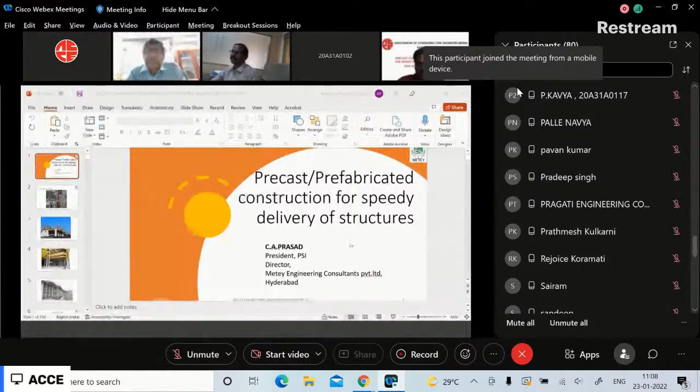So the topic today is prefabricated construction for speedy delivery of structures. Hopefully it will be interesting to you, this new technology. It should be interesting, and we will look at how we will proceed with that.

Let's look at the cast in situ system. In a multi-story construction, you can see it applied.

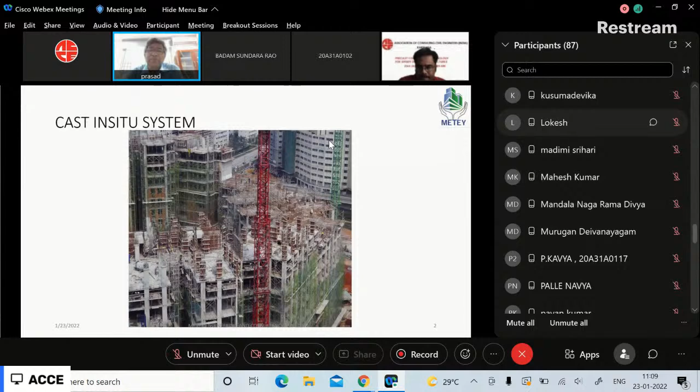So now let us look at the cast in situ system. You can see a lot of congestion in multi-story buildings where a lot of formwork is there all around, especially when erecting. In this photo, what you are seeing is only the column structure. Once the beams and slabs are added, it is pretty difficult to walk around and do all this.

In conventional construction, the formwork plays a bigger role - formwork for columns, formwork for beams, and heavy shuttering, scaffolding works and supports. When there is a big podium, you need about 6 to 10 meters, and very heavy shuttering comes into play to support it. Sometimes you even provide steel beams over entry portions to support this.

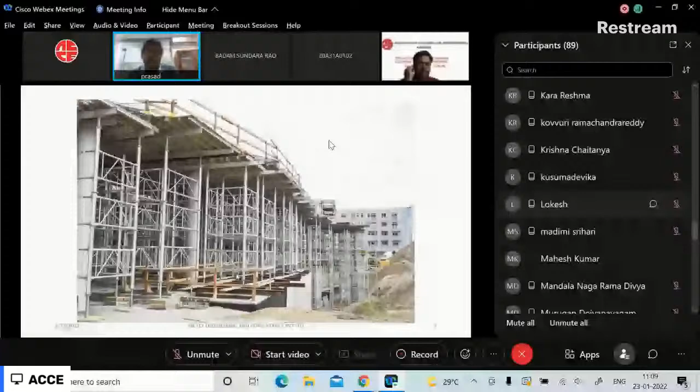But when you look at a precast system, all these elements come from the factory - wall panels with openings and all - and you don't see any congestion at all. The elements are directly coming there, you hardly see any labor into the system. This is the beauty of precast construction.

Now let's look at precast abroad, especially in America, Middle East, Europe and everywhere they are constructing this way. Even facade panels are built using precast elements, and you can see colored facade panels made using a colored pigment - they add a pigment into the concrete and get a beautiful color of whatever they want. We are doing this now in India also, and that's a good sign.

In the buildings, I have been in the Middle East starting from 1995 to about 2005, for about 10 years. When I went there in 1995, there were only three precast companies. By 2000, about 10 precast companies had come. By 2005, there are about 20 precast companies.

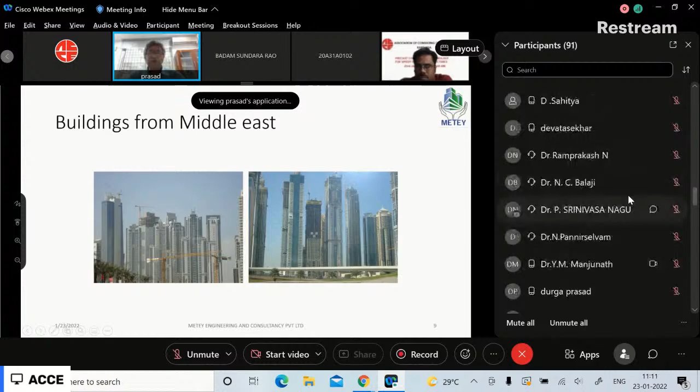Still they are insufficient for the big development and growth that has taken place in Dubai and the entire Middle East. This is how you can see the mushrooming of towers, all built predominantly using precast structures, and some structures are even built with cast in situ too, because the precast factories are not able to meet the demand. That is how this has come about.

Even looking at conventional construction, in 1995 a 30-story structure was taking about 5 years to build. By 2000...

So there is a beauty with precast construction as well as conventional construction, because rapid changes have come in formwork also. Sometimes it is partly conventional and precast mixed together in these structures.

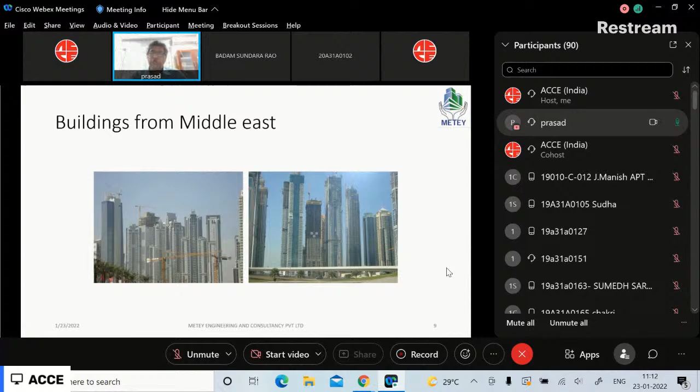Especially when talking about lift core walls and such, they still go with the conventional form, whereby slip form technology and jump form technology are used for the construction of these lift core structures, such that they go faster than the structure being built with precast or conventional construction.

Now let's look at some of the precast projects in India - this is Omkar in Mumbai. What the government has provided in Mumbai is, in the slum rehabilitation areas, they first have to build the structure so whoever the displaced people are can be accommodated, and then for the remaining area, they can develop what they want.

As a result, L&T have taken up this particular building to be built as a 20-story structure in 1 year's time, such that all these slum people can be accommodated into this building. Thereafter, they can construct the building.

So in order to do a 20-story structure, so far precast is the only answer. They have set up a precast unit there itself and built this particular structure within no time. In this structure, they have even made the toilets as a box-like structure with the door opening, such that there are no leakages. Toilets are the hell of the thing whereby leakages happen. So they made the box-like structure, brought it and put it into the structure. Thereafter you can see load-bearing precast walls, precast stairs, and hollow core slabs coming on top, which is a very simple way of construction. That's how they have done as much precast as possible, such that there is no in-situ construction at all in this structure.

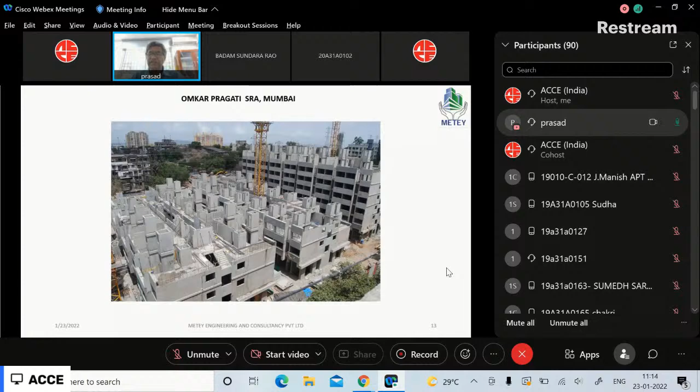Some CTS Canteen Pune is a precast structure. Santushti Homes at Bhiwadi is a 250 affordable home, G plus 3-story blocks, again with a load-bearing precast wall and hollow core slab section. This is how these buildings have come up, with load-bearing precast walls coming on trucks, and the tower crane will lift and place them one over the other. They have dowels from the walls, such that one wall comes over the other, and then they grout it. I'll show you some more details as we proceed.

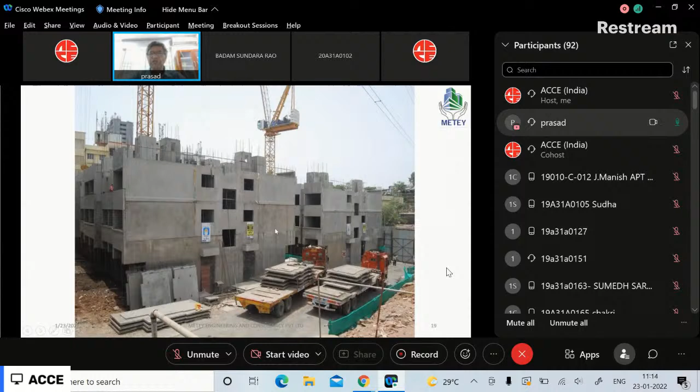Even Lakeside at Chennai is being designed by one of my friends, Saurabh Purandare, a precast designer. He does only precast designs, whereas I do both. He's a wonderful designer from Pune. He has also designed a 16-story Pina project for Tata at Bangalore. We can see that again it's load-bearing precast walls and hollow core slab.

Now I have been talking about load-bearing precast walls, not precast columns and beams. The beauty and advantage with load-bearing precast walls is that in the case of an RC frame, if you are constructing a column and beam and on top of that hollow core slab is building, you have the flexibility to build the wall again inside with AAC block wall or brick wall. But in a load-bearing precast wall, the hollow core slab will come and rest on the wall, so it's like a uniformly distributed load for every millimeter of the wall. That's why we call it a load-bearing wall.

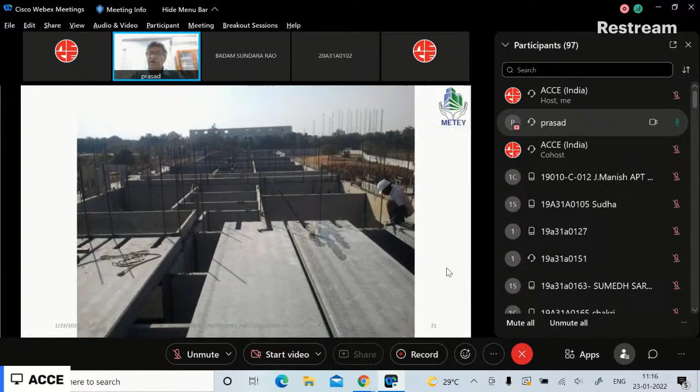For every millimeter portion of the wall, there is a slab load coming on top, uniformly distributed. When you provide a load-bearing precast wall, no columns and beams are required. It is directly an element eliminating everything. In RC frame construction, you have columns, beams, and an infill wall. Now all these three are eliminated. Only a wall is coming in place of it, which is a concrete wall. There's no plastering required thereafter. A slab is placed directly on top, and then a structural topping is done. I will talk about structural topping a little later.

Now Janapriya was the first developer in Hyderabad to take up precast, and at that time they involved us to do this particular design. So these are all precast walls with openings and all, and you can see some dowels coming out. What they do is the dowels coming out from the foundation go into the sleeves, which are 60mm sleeves provided. This dowel from the foundation will go directly into that, and thereafter we'll grout that particular portion, and it will be in the correct position.

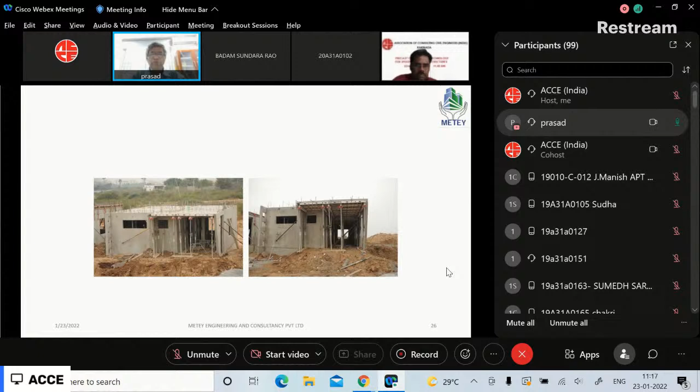At that time the gentleman did not take the precast hollow core slab because he had a fear, back in 2005-2010 when they took this up, that the hollow core slab would not be accepted by customers because there is a hollow inside. So we went with a PT slab for this building, but with load-bearing precast walls. Load-bearing precast walls, but with a PT slab, that's how we went up with it. Yes, you can make the wall of whatever elevation type you want, with openings and all, and elements can come and directly get erected over there.

But in the same compound, those are villas. Janapriya have taken a call that yes, let them deliver a building within 1 year instead of making people wait for 3 years and then pay the loan rent to their bank. So they have also done a 10-story structure in the same compound of about 4 towers, which they have made.

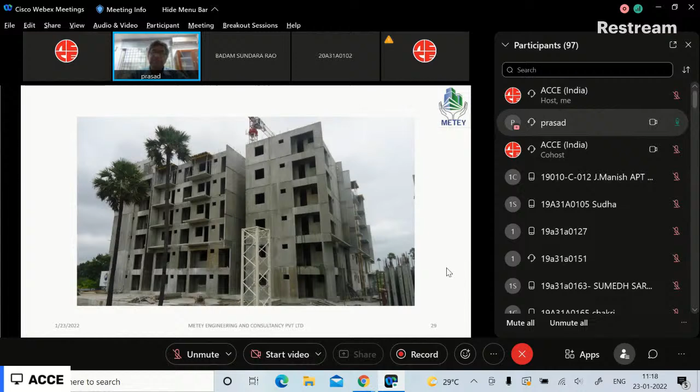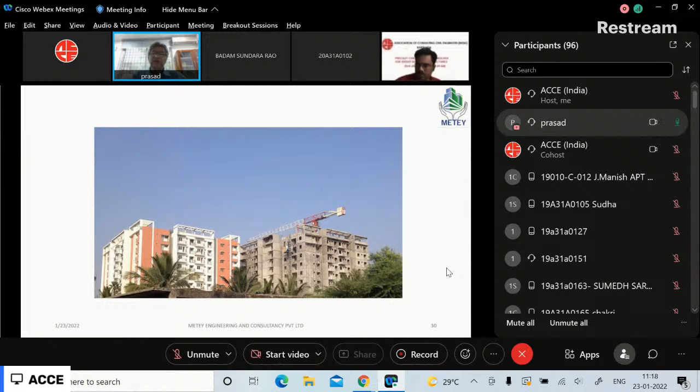In each floor, they are getting about 10 apartments using load-bearing precast walls, but with a cast-in-situ slab is what they have done. This is a 10-story precast structure, and they have delivered it within a 1 year period. The customers are also happy of booking it within 1 year, getting the building instead of waiting for 3-year long period, which the developers usually will take.

Thereafter, BDA Bangalore, Bangalore Development Authority, have also done using some Gauri precast at Alur, Bangalore, where they have done a different type of construction.

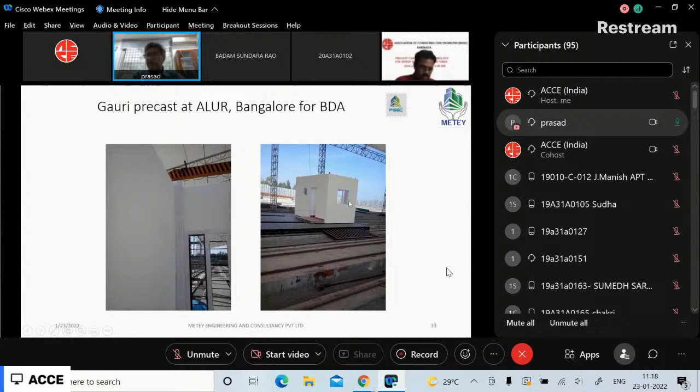They do the independent walls here, and then they connect all the walls together with a bottom slab, and then the walls are all connected. Everything is finished at the bottom level, including painting, doors, even the kitchen tiles and everything with those. This they will lift and then bring it over here on the rails to the end, put it on a truck.

This will go to the place, one placed over the other on top. Like this, the 4-story towers that they have built with a quite good number of structures, with ease. So thereby no one is required to go to the top and do finishes again. It's a bottom slab, walls are connected, everything together, painting, everything is done, finishes, and then this is lifted and placed one over the other. That's how this construction went on.

So 2 types I have just shown. One is Janapriya developers, the other is BDA's. Now we look at the precast industries.

There are a number of precast industries that have come up now in India. In Hyderabad, Janapriya developers have set up a battery mould for their own use, and PRECA is a factory which is delivering structures to industry, both for the building sector as well as for the pharma and industrial sector.

Skill Promoter again has built one huge shopping mall at Kondapur near the high-tech city. They have built one hollow core slab unit within the factory itself, and they have built a wonderful commercial complex over there. Inventaa Hyderabad, Inventaa is now setting up.

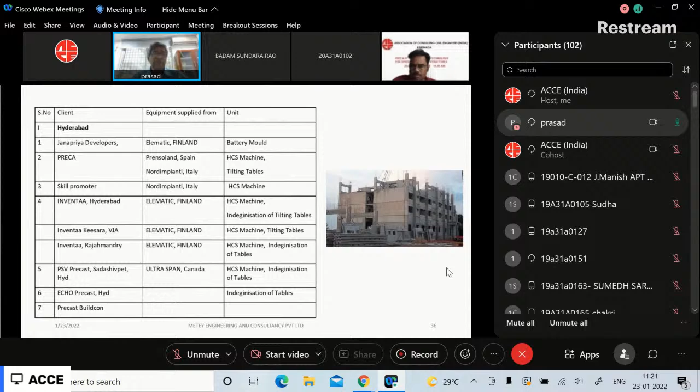So Hyderabad is now very well set up, and there is one more factory that has come up, Teenage Precast, which has come very near to Nalgonda. Teenage is basically from Coimbatore, now they are branching out. They have set up one in Nalgonda. From Coimbatore, they are meeting the requirements of even Chennai as well as Bangalore. They have set up a big factory in Nalgonda, and they are also meeting the requirements of Hyderabad.

In Chennai, BME Precast is one wonderful precast firm where they have delivered structures for DRDO and other commercial structures, and also built one big hotel project in Chennai.

In Pune, there is Precast India Infrastructure, where my friend Mr. Ajay Bhate is there. He is a very passionate civil engineer who set up this precast factory in a very big way and is doing wonderful structures. I shall show some of the structures we built. And then there is Best I Precast, which I also helped set up in Pune.

In Mumbai, L&T set up one facility for the purpose of a particular structure, and then removed it, but they have delivered the structures.

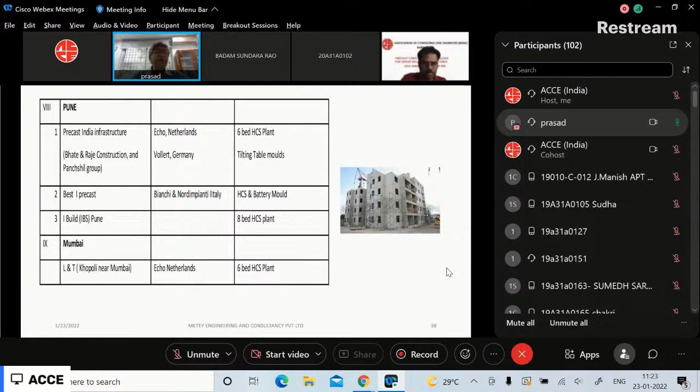In Noida, Supertech is in the entire NCR region. I could see only one full-fledged precast firm, which is Supertech. Now they are also delivering stilt plus 8-story towers for DRDO, which are being designed by our firm METEY.

BJ Shirke has done wonderful structures for Delhi Development Authority. BJ Shirke has a very different technology where they make a hollow portion precast column and then pour concrete on the side. Even for beams, they get a channel in a U-shape type, such that they put the reinforcement thereafter, and then pour concrete into that. It's a different technology which they use, but it is doing well. Structures are well tested and proven even by IIT Chennai, and they have checked it and found it to be very good.

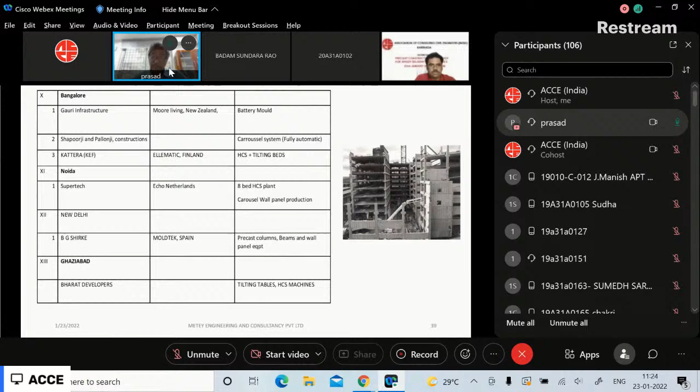Bharat City developers in Ghaziabad built 30-story towers and 16-story towers like this in the NCR region, which is an earthquake zone 4. They are wonderful structures. I will show you some of the properties.

Now, types of precast frames are such that there are precast columns and beams, and initially there was the hollow core slab. Later on, structural elements are like pre-stressed precast solid flat slab, or hollow core slab. I shall come back to this in detail - what is hollow core, and why we are making a hollow core. Then there is single T slab and double T slab.

Single T slab and double T slabs are predominantly used for car parking structures, large span structures, whereby you can even use them in shopping malls where they want a large column-free space. Hollow core slab can span up to a maximum of 15 meters, and the thickness increases as you increase the span. It starts at 150mm and keeps on increasing.

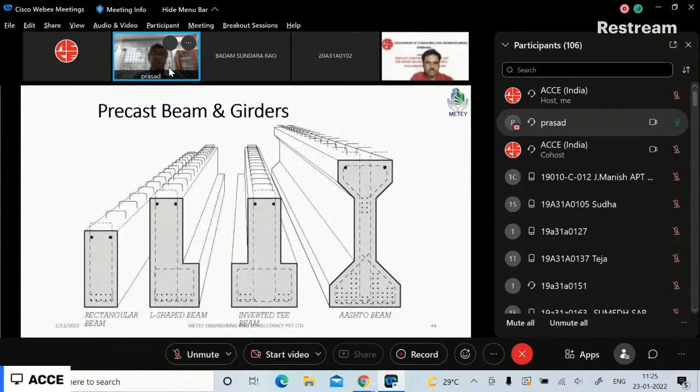Precast beams and girders are RCC precast beams and girders. These girders are predominantly used in bridges, as you might have seen in buildings - we use these inverted T beams, L beams, and even rectangular beams.

Precast columns are such that, in conventional construction, because of the formwork and other things, we construct a column up to one floor, then put up formwork for the beam and slab and cast it, and thereafter the next floor column like that. In precast, if you can lift a 3-story column or a 5-story column, you can construct it at one stretch and then erect it such that you need not do it for every floor. That is one beauty that we have done even in Hyderabad.

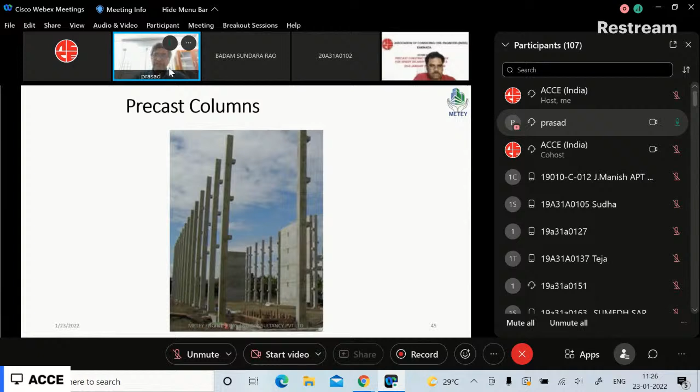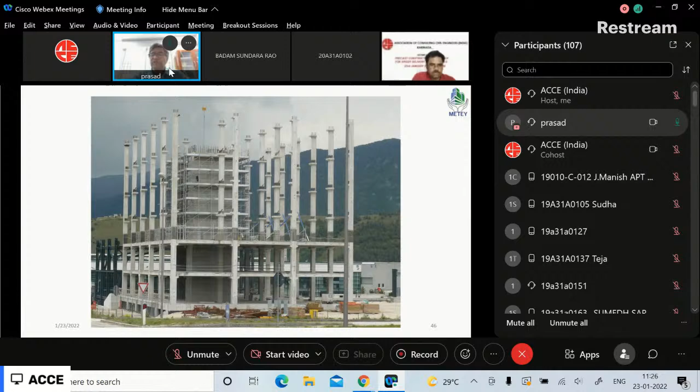In this structure that I am showing, you can see a 2.5-story precast column, and thereafter a 3-story precast column. By doing so, you save time in terms of erection as well as transportation - the ultimate saving in time. You can see that the 2.5-story column and the 3-story column are joined together, and then they pour concrete at this edge.

You can also see that in the 3-story or any column that is built, the concrete is left over at the junction where the beam reinforcement is going to come. Beam reinforcement enters into that junction, and then they pour concrete into that junction, and then you have a corbel to make the beam sit on this corbel.

To make the beam sit on this corbel, you can see at the bottom the beam is sitting on that, and then a double T slab is sitting on the beam like this. This is how the construction will go on to make it faster. Other precast slabs are such that they can simply be erected with a lifting arrangement with a bracket. You can erect it over brick masonry walls, an RC column frame, or a load bearing precast wall, whatever way you want.

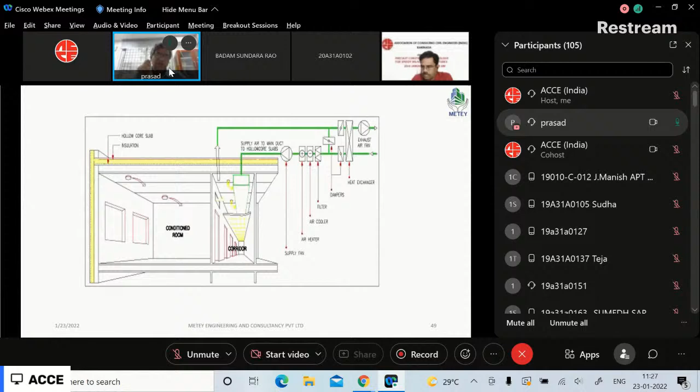There is a shopping mall in which we have used hollow core slab as a ducting system, because there are hollows inside. You can make the air circulate around, and make a hole wherever you want so it circulates the air inside. By doing so, the shopping mall was saving about 40% of the air conditioning bill. Why? Because they cool the structure a lot at night time, such that in the daytime it won't take much power consumption. This is one of the facilities that hollow core slab can be used for, but it has to be properly designed for the particular system.

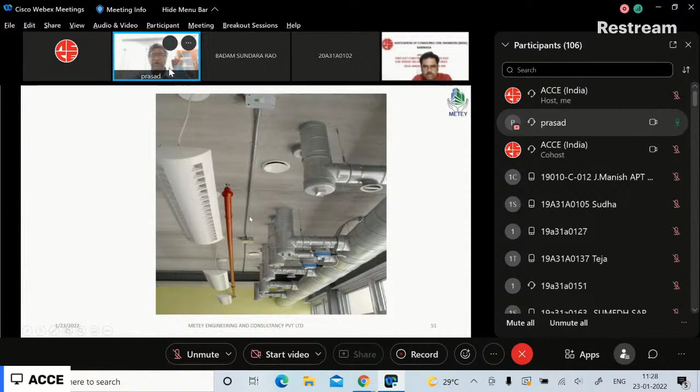This is how we have used it for a shopping mall in the structure. To the hollow core slab, you can fix anything - electrical conduits, fans, pipes, or anything into that, not an issue. Some corrugations are there, but I won't emphasize much on that, just for information purpose.

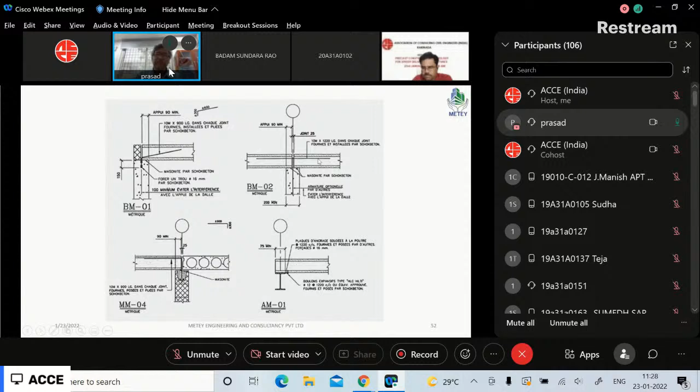On the load bearing precast wall, two hollow core slabs can come. At the junction, we put one more bar for continuity purpose, and we pour the concrete. Over a steel beam also, hollow core slab can sit, or a solid precast slab can sit, and on a load bearing wall also you can make the hollow core slab sit.

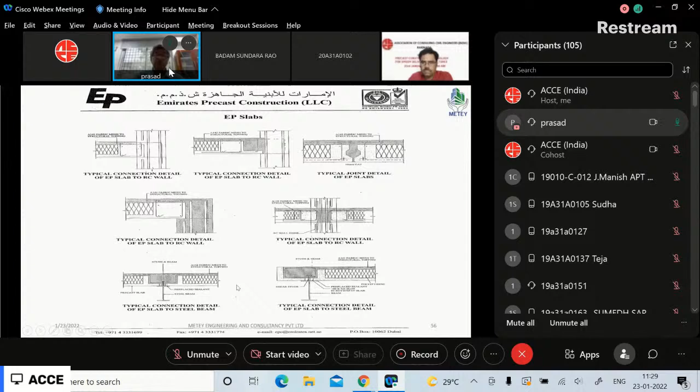You have pre-stressing strands here. These are shear loops which are given for continuity and connection purpose between the top and bottom slab, such that it acts as one monolithic slab. This technology is coined by Emirates Precast Construction in Abu Dhabi and Dubai, where this system is also used extensively. It can be placed over steel beams and precast over load bearing walls and so on.

Pre-stressing tendons are kept here, and initially only 50 mm thick concrete will be placed on top. Thereafter, after placing a number of units side by side, they will do one more structural topping as a connection to all the units, which creates a diaphragm action and brings continuity into the network. These double T slabs have a beauty in terms of large column free space. I'll show you one of the photos where you will be amazed to look into that. Now you see abroad with double T slabs, long trucks are placed there for 30-meter long, 40-meter long elements going on the track.

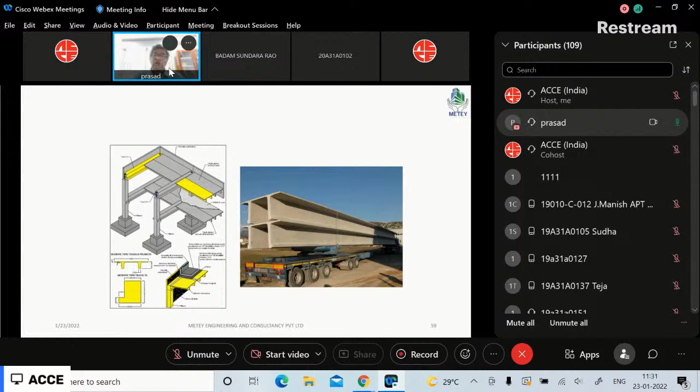So now you just see this. I was just telling about double T slabs. You can see that there is a groove, double T slab with a hanging slab on the side.

Now, there is a column here, spacing is about 10 meters. But then the double T slab is spanning about 30 meters. That means at every 10 meters in one row you have a column, but for the next 30 meters there is no column. From this column to this column, there's a gap of 30 meters.

So for a shopping mall, they have this wonderful facility in terms of racks that they provide. They can provide wherever they want because it's a large column-free space. That is the beauty with these double T slabs, and then the columns are coming with a precast beam at a spanning of 10 meters. So there's one advantage.

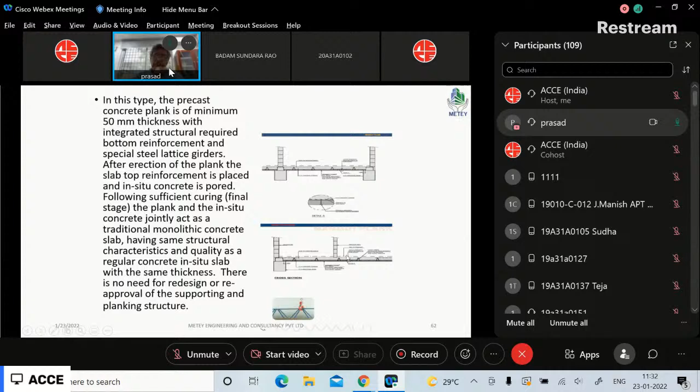Now, all these systems that I have shown involve pre-stressing wires, pre-stressing strands. Without that also we can do one more thing in terms of this particular slab, which can be done by casting only precast without pre-stressing strands.

Yes, this is called a lattice type of system where you can cast only 50 to 75 mm of the bottom, and after placing it on top of the beams, you can pour the rest of the concrete. From the bottom concrete already cast in, this lattice type system will be the bridge to the top concrete, thereby the slab will be monolithic. So this is how it is.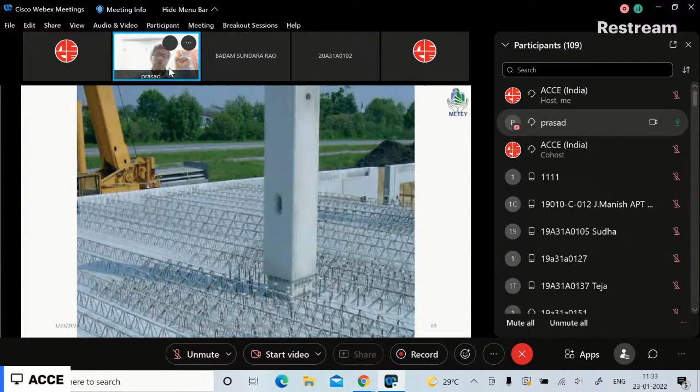You can see that it's about 75 to 100 mm thick concrete and a length of about 10 to 12 meters. They have provided some holes where the columns are coming such that it goes through the columns, and then the structure is done. There is no pre-stressing into that, and the thickness may be required 200 or 250, whatever is required, they will place it.

So what is the advantage? Without using the pre-stressing system, it is just simply a cast and screw system. I'm trying to avoid providing plywood, because only 75 to 100 of the concrete is at the bottom. The rest of the concrete that is required, I'll be providing on the site itself.

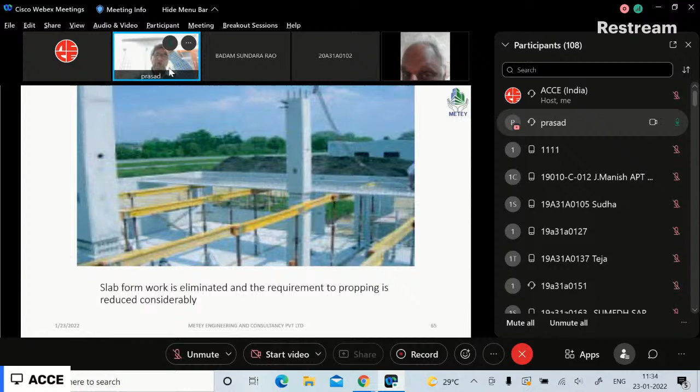So what am I trying to achieve? I'm avoiding the plywood, which will consume a lot of resources. But since it is an element of only about 75 to 100, it requires support at a span of 2 to 3 meters to take the additional load of concrete that we are going to pour. Thereafter, it will rest on the beam till it gets hardened. Thereby we are able to avoid a lot of plywood and a lot of beams in other directions. This is one system anyone can adopt at their level using tables into that.

Now this is how the particular system is placed, and on top of that they pour the concrete. Precast stairs is a beauty, because in conventional construction it is so cumbersome to provide the formwork for stairs. So here, vertically they just put up the mold, horizontal length, whatever the particular length into that, and then they just pour concrete of that width of the stair of about 1 meter height into that. That's the beauty of precast.

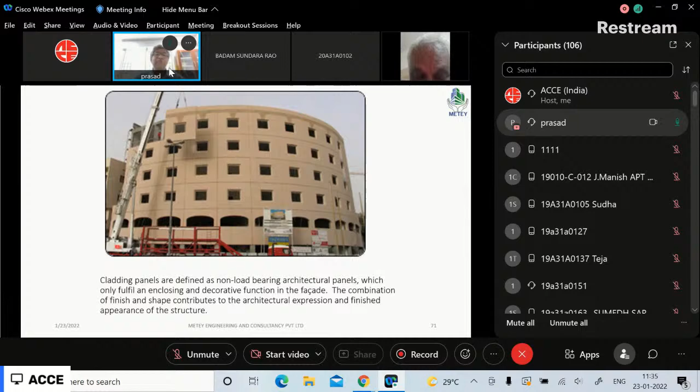Then we have these precast walls. Facade walls are a beauty, curved walls are anything. You make a formwork with steel shuttering and pour concrete into that. They added one colored pigment into the concrete. Here they use white cement, and then use the pigment, and they get a beautiful pinkish color. By doing so, it's a natural color which will sustain there, and there is no need to do painting or anything thereafter. It's a lifelong structure free from paint and other maintenance. That's the beauty which you can do here.

We'll just see some of the buildings. I don't know how many of you have seen this particular building. The last time Chief Minister Chandrababu Naidu was visiting Kakinada, the local MLA said that one precast building is to be built here within a week. So we had this precast wall panels already ready available at Vijayawada.

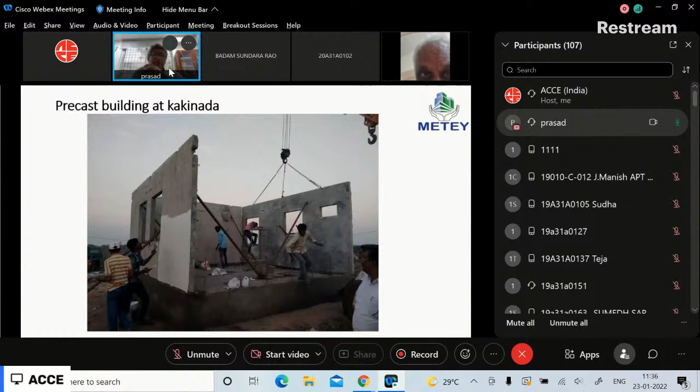So we sent material there, and within 3 days we built the foundation and raised the wall up to the plinth level. Then we built these 4 walls, just 4 walls all around, and on top of that we provided a hollow core slab.

On top of that, because the 4 walls were already there with openings and everything, internally they provided some more walls with AAC blocks, and then on top of it, a hollow core slab. Then they built a bit of a parapet wall, and the building was ready within 1 week.

Where is this building in Kakinada? It is on the beach road. It was built already somewhere around 2017 or 2018, if I remember.

We sent this building with wall panels readily available at Vijayawada, and the building was totally built in 1 week. This is a 300 square feet building with one hall, one bedroom, one kitchen, and a toilet facility.

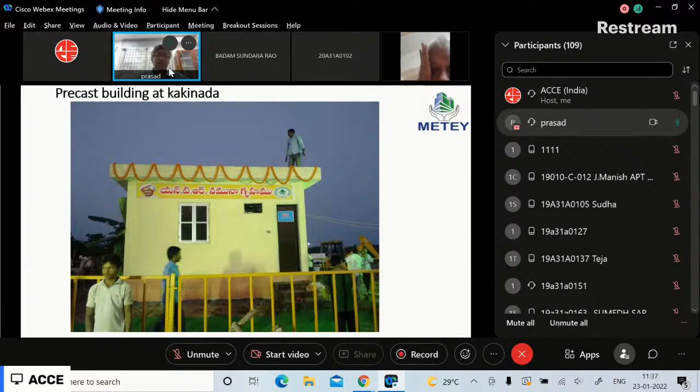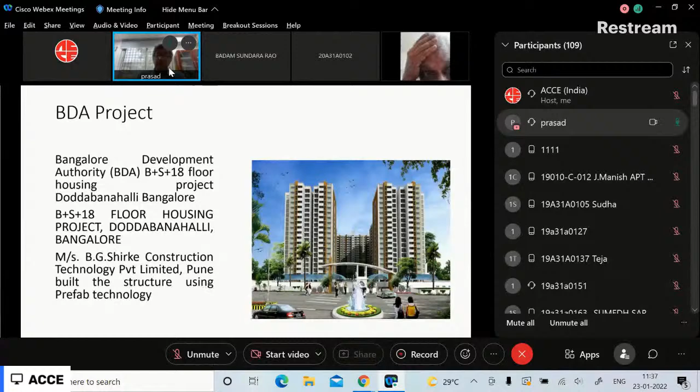Precast India Infrastructure in Pune have built this building. And the BDA project, again, they built basement plus stilt plus 18 floor building. In Bangalore, they built this particular BJ building. In Hyderabad, Preca has built this building.

Steel plus two levels of stilt for car parking purpose, plus ground plus four structure, 1,65,000 SFT. They delivered it in 4.5 months. That's the beauty of precast, where you can deliver in 4.5 months.

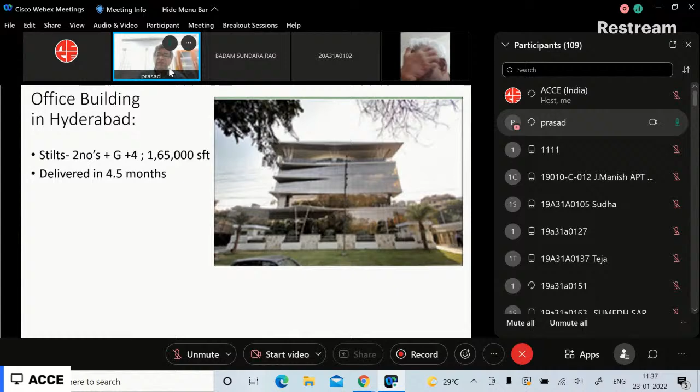That means the main structure, the facade and all that, took its own time. I'm not talking about that, but the main RCC structure was built in 4.5 months. Even G+4, Preca built this for a hospital building, completed in 4 months, a contract of 20,000 SFT.

They have also built one where Preca built on top of a steel frame and put up the precast slabs. For the Cadbury project, 2 lakh SFT, they delivered in 5 months.

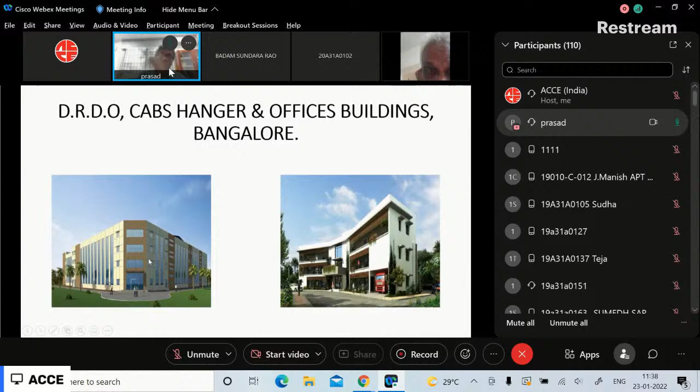These are the BME group in Chennai. They built this DRDO CABS hangar building in Bangalore. From Chennai, they shifted all the material up to Bangalore and built it there. They also built the Novotel IBIS Combo Hotel in Chennai.

This is all precast building, and when completed, it looks like this. The Shivraj Motors building is also built by BME Chennai. Chennai Silk Showroom, Tirunelveli, is again built by BME.

The office building in Guindy, Chennai is built by BME Precast. This is Lakeside Chennai, again built by them. This is designed by my friend Saurabh Purandare.

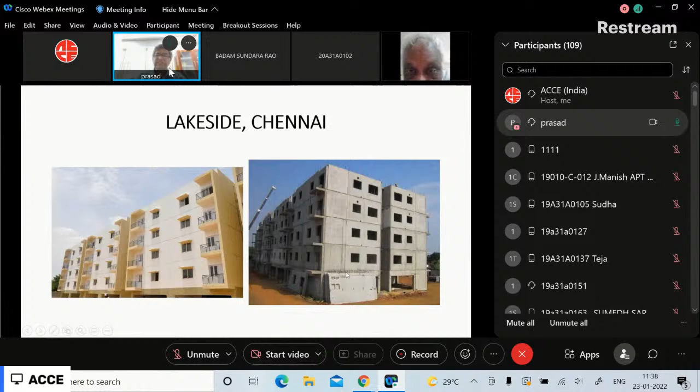Teemage Coimbatore is also doing well. As I said, they built one canteen block in just about 38 days. This is about 13,500 SFT, built in about 38 days.

There are beams, columns, hollow core slab, wall panels, and everything, you can see that. And Rotary School, Tirupur, Tamil Nadu, they just built this building in 28 days.

They just wanted a building, saying 'we want to run a school.' But before building this building, we require time to make the elements. Maybe the precast industry will take 1 or 2 months to make all these elements.

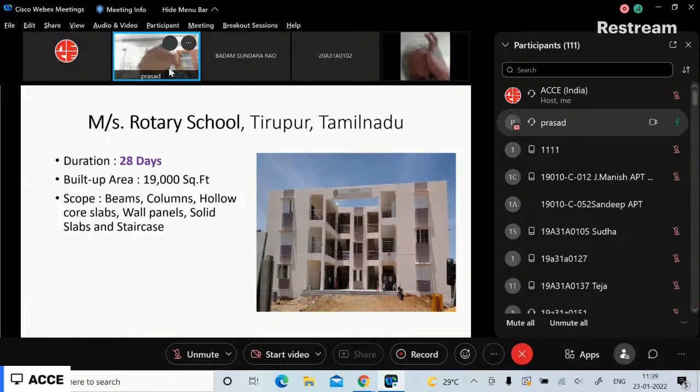The design process goes on, but after coming to the site, it just took only 28 days. That's what I'm trying to emphasize - at the site, it just took 28 days to complete.

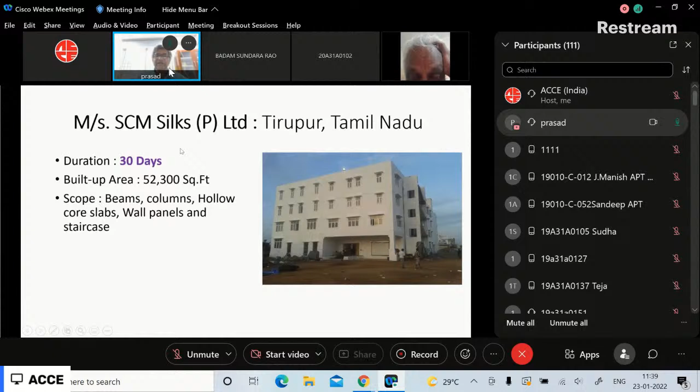So again, SCM Silk, Tirupur, Tamil Nadu, also built by Teemage in about 30 days time, 52,300 SFT. Again, Christian Medical College, Vellore, Tamil Nadu, built a building in 27 days, 50,000 SFT.

And these are industrial structures again, a number of structures they have built. You can see the 3-story precast house which they built for the structure.

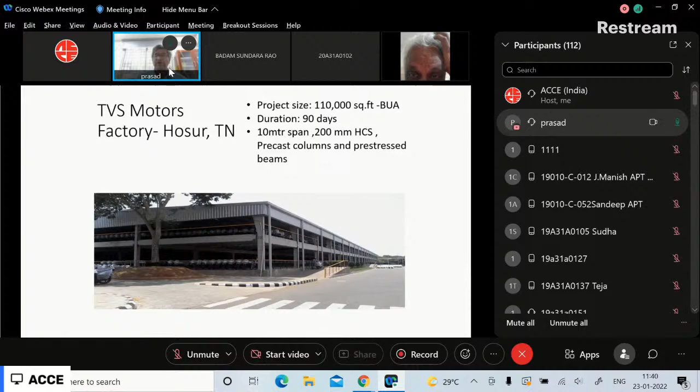The Novotel IBIS we have already seen, and then TVS Motor used the PEB steel structure building, but on top of that they used the hollow core slab, deck slab and all. You can see this hollow core slab, but on top again it is a roofing structure.

It can be a composite structure like that, it need not be everything concrete - steel plus precast hollow core slab, a composite structure. Now this is what I was talking about.

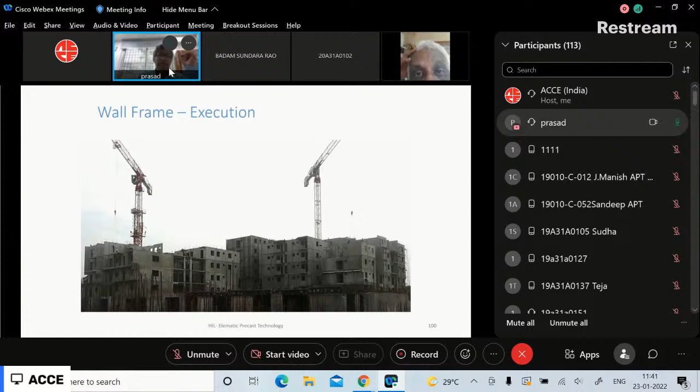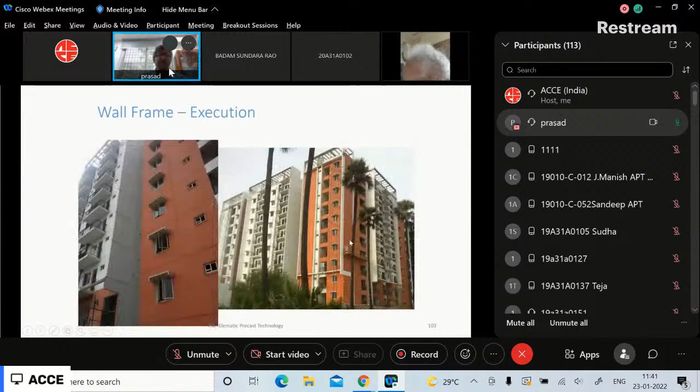In the NCR region, Bharat City developers have adopted this particular structure, building 16-story and 30-story towers. My good friend Bob, who is from abroad, Europe, designed these buildings with load-bearing precast walls. The elements are built using this structure, and when completed with paints applied, it looks beautiful. This is how the wall frame execution is done.

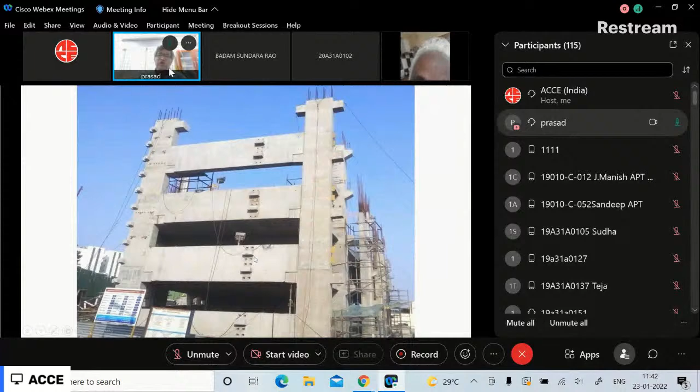Now you can see one concave and one convex precast element, fixed all around as a facade structure. To fix those elements into these precast beam elements, they have provided supports for the concave and convex elements to come and get fixed over that. You can see these elements coming out, the precast columns and beams, with hollow core slabs inside. All these protruding elements are meant for these concave and convex pieces to come and fix in like that.

The air flows into that, light goes inside, such that there is no lighting required in the daytime. It's a wonderful concept. But the beauty is how much struggle they made to create this particular element, then transport it, cast them, transport, store, and erect them. They wanted to do a beautiful structure, and with precast, there's a beauty we can achieve. With conventional construction, it's too difficult to do, I'm sure all of you will agree, but in precast this is quite possible.

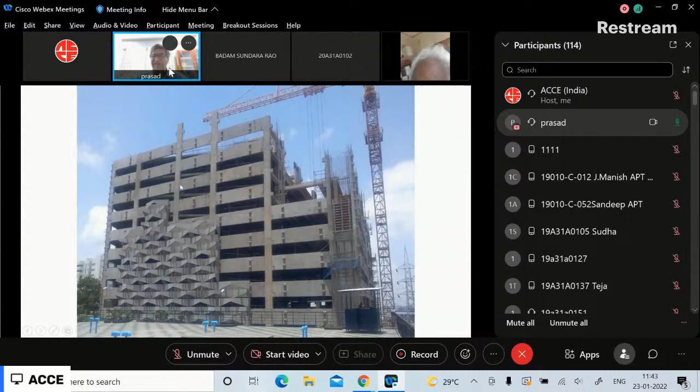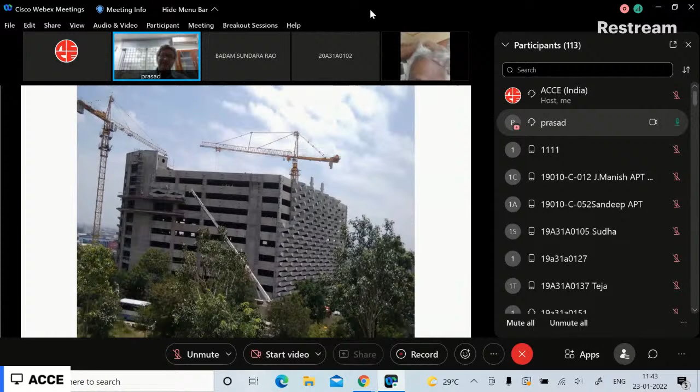Each individual element is fixed over there with wonderful precision. Whenever I see this building, I take a lot of pride. What a beautiful precast structure and facade that Precast India Infrastructure have built. It is the beauty of the structure.

Now, an 11-story residential precast wall construction is built at Uppal, Hyderabad. I appreciate the Telangana state government, and my friend C.A. Prasad, who convinced the GHMC, Greater Hyderabad Municipal Corporation, to adopt this technology in that district where there are about 34 towers. Conventional towers, monolithic construction, and precast construction have all been built there, as we wanted to demonstrate 3 technologies at one location in Guddigal, Hyderabad.

The conventional construction technology, monolithic construction technology, and precast wall technology were all used. This is how usually whenever they build a wall, they provide the sleeve, the reinforcement, shuttering for windows and ventilators, and then the dowels, and then put it on a table of 4 meter by 5 meter.

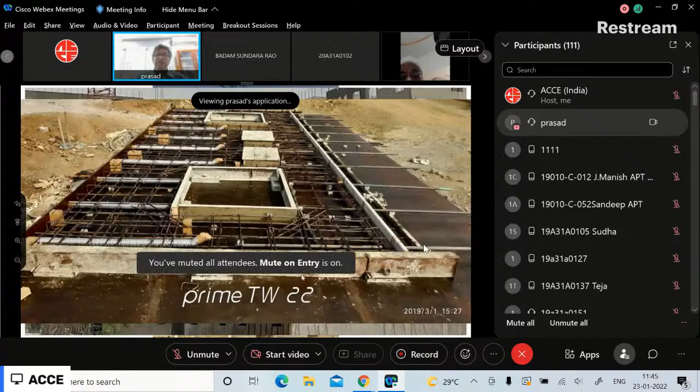What we have done here is only the external walls as load-bearing precast walls, and then provided a 6.2 meter hollow core slab on top of that. All the internal walls are built on top of the hollow core slab, made with AAC blocks. Having done the external walls this way, they do not require any plastering or anything.

Directly painting is done to that. There are about 14 blocks made of precast, beautifully built into that. The technology is demonstrated for conventional monolithic as well as precast construction, and then they are completed and handed over to the ground.

We have one wonderful developer, Puja Construction, a contractor come developer, who wanted a type of construction to showcase the grooves, wanted to see the beauty of the grooves. So within the table, they erected this with the grooves also, and they pour the concrete, lift it, and you get the grooves out of it.

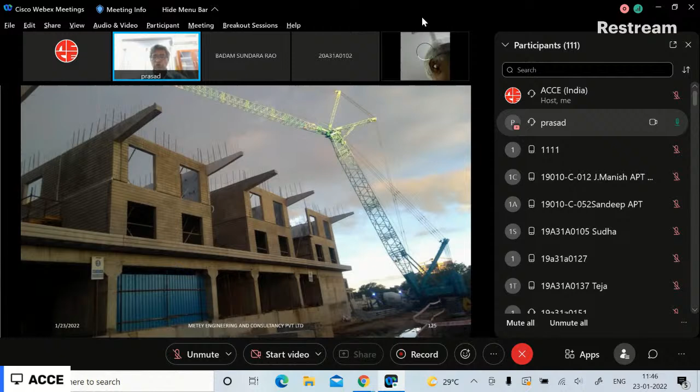This developer has a passion that he wanted landscape shown in front of each apartment. It's a duplex type apartment, a 10-story building, about five duplex types totaling 10 stories, and two basements down. Now I'll show you the next slide where this is a precast element with slots like this.

Within these slots, they will provide flower pots, huge ones with soil, placed there such that each apartment guy can enjoy this beauty of landscaping in this particular structure.

So this is how the building is coming up. They are doing it right at the site itself. They have set up their yard, and these are the precast elements for the landscaping purpose. We have done even the precast one.

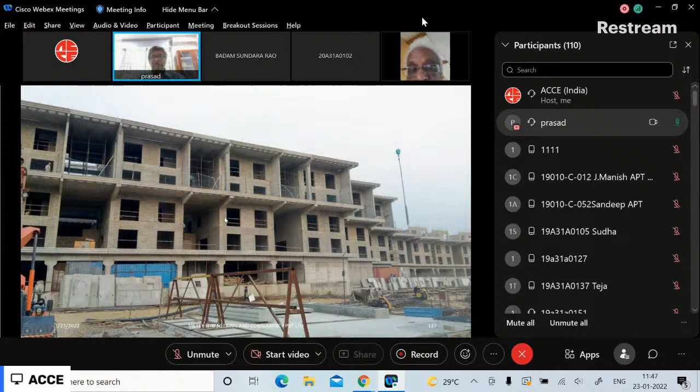This cantilever beam, projecting from the wall, takes the precast element, simply supported onto that, and then the elements come on top of it. You can see there are columns also at the bottom, and walls into that. The proper structure is coming up in a beautiful form.

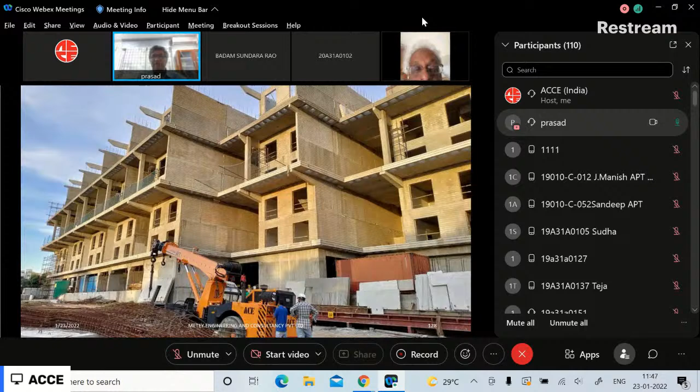We can look at it. This is how it is now. Already 1, 2, 3, just two more duplex forms left, whereby it will become totally a 10-story structure, but it's a 5-story duplex structure, and the vision is fantastic.

Growtech couplers are very typical connections for the columns, whereby they have only about 250 to 300 mm cast iron sleeves. The bottom rod comes into that portion by about 200 or 250 depending on diameter. The top bar will be threaded and grooved. There's no continuity between the bars, but the grout poured into that is a high strength grout giving the connectivity.

We tested them in the Vijayawada Siddhartha Engineering College laboratory in the presence of NIT Warangal professors, and found that the Growtech coupler is doing wonderful, and the rod is breaking, but not the grout. The grout has so much additional strength and adhesive strength, where we are pouring about 80 to 90 MPa grout into that particular portion.

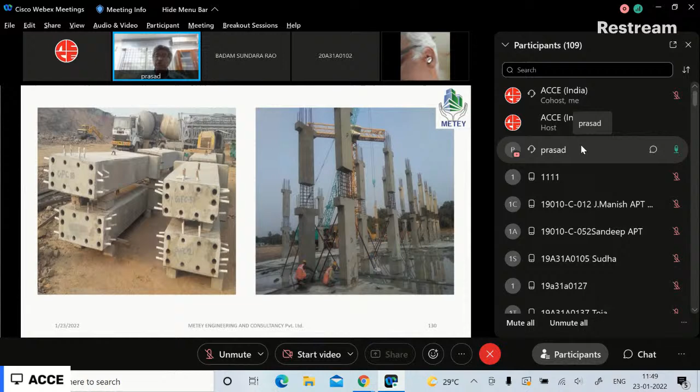So here we have done a 2-story precast column at one stretch of a size of about 750 to 900 by 400 in width, and the beams will come and join at this juncture, and we do concreting at that point. You can see that structure how it rises when completed, and there are hollow core slabs of about 12 meters span.

Hollow core slab, 12 meters span. It's something like from here to here is a 36 meter by 12 meter span, with no columns in between. A 12-meter hollow core slab is going, and thereafter the corridor and so on. So that's the beauty of doing these structures in precast.

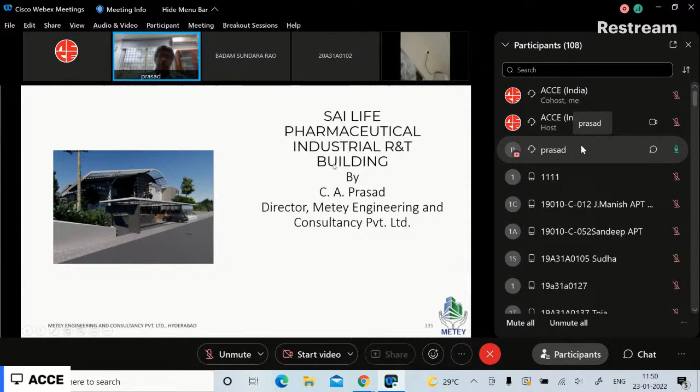With this building, all the interiors, when you look at it, came out exactly like that after the building was built. These are the initial conceptual planning done by the architect, and it turned out to be exactly like that, with beautiful landscaping and all that.

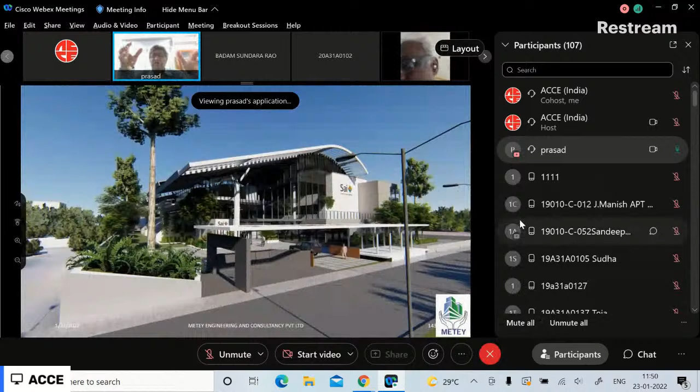So what have we done here? They already had certain buildings around, so they did not want a conventional construction with dust and disturbance. They wanted a precast building such that there is least disturbance, dust and pollution at the site. They wanted the building built within about 6 months, but we took 7 months because of some drainage and water table problems. It took 7 months, but we completed and handed it over, and then they built the remaining structure.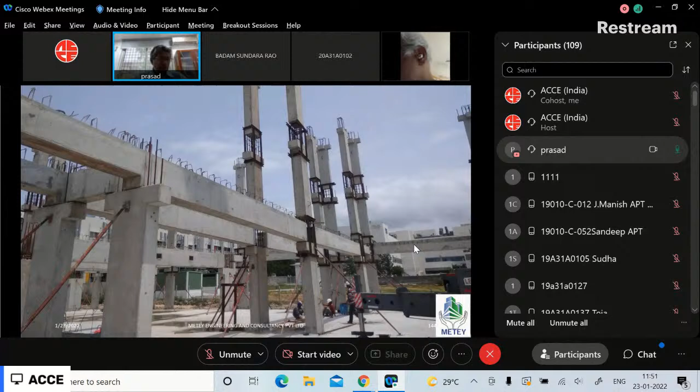So what is our philosophy here? We have gone for a 3-story precast column, leaving the openings wherever the beams are supposed to come and join. There are certain locations with 3-story precast columns, some locations with 2-story precast columns, and in some locations only a single-story column. Why a single-story column when we have built a 3-story column elsewhere?

The single-story column is adopted where there is a cantilever beam projecting out. You can see there is a single-story column, but from inside there is a cantilever beam projecting out. When a cantilever beam is projecting out, we wanted the column reinforcement to go through the cantilever beam. So we have provided sleeves in the beam such that the column reinforcement projects into that. That's how we provided the single-story column.

Otherwise, in the other locations, beams are coming and joining with corbels and such, so we have provided a 3-story column there. All these steel framings help during transportation so that the elements don't break. While erecting this precast beam, these frames are removed, and then the concreting is done, making it a monolithic structure.

You can see we have done a 13-meter long RCC precast beam with openings given where the industry wanted, such that they can take pipes and other things through the beam itself. We provided holes below the neutral axis zone and allowed the pipes and other MEP services to go through the beams. It's possible to do so.

All the hollow core slabs are erected, along with the 3-story and 2-story precast columns. On one side we have about 7.5 meter precast beams, and on the other side a 12 meter long precast hollow core slab. We have only a peripheral beam, no internal beams - only the peripheral beams - and the hollow core slab sits like this with a 12 meter span.

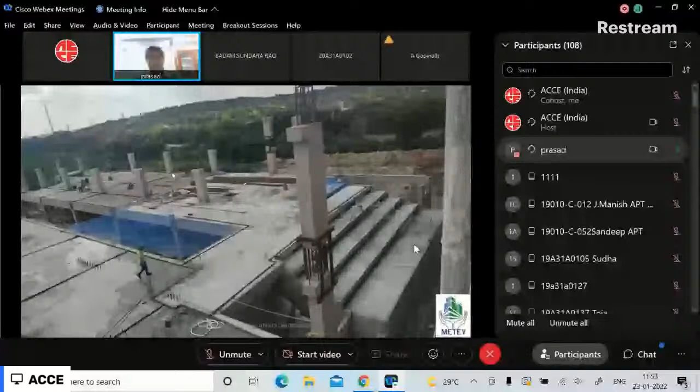So this is how the structure is built over there. You can see that, and after its completion, yes, it looks like this. Internally, also a beautiful structure.

Recently, our PSI executive committee members all visited Ahmedabad, where we wanted to conduct our next workshop at SCOM in Ahmedabad on April 14 and 15. We saw 2 precast companies in Gujarat, Ahmedabad - one is Urbanac, and the other is PSP Precast.

We're quite happy and heart-filled with happiness to see the quality of precast they are doing in an amazing manner. I can see this gentleman, Mr. Arjun - he's late in his 20s, and he did not know anything about precast. So he started visualizing about it, went through the internet, got hold of people, and then decided to venture into precast construction and set up this particular industry. He's already doing some wonderful structures around.

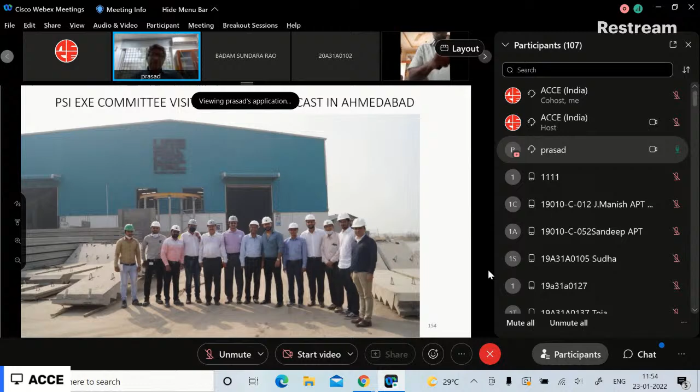So what he has also done is ensure quite amazing quality in the factory. He is sieving the sand about 2 to 3 times before using it, such that no unwanted particles come into the concrete. He was also telling me that he uses only Ultratech cement, only one brand, such that the color of the element is maintained throughout the structure.

That is one very important point that the precast companies have to take into account. If you take only one brand, only one color maintained for all the elements, later on you need not even paint, because the same cement color can be seen in the structure.

Abroad, they don't even paint the structure because concrete itself is robust. There's no need. Why do we paint? Because our brick walls or AAC block walls are not strong enough to resist water, they absorb it. So we provide paint on top of the brick wall or cement plaster surface as a protection, so water will not enter the brick wall. But when you are doing a precast concrete wall, there is no need of paint, because it is already a very impervious surface, right?

So if you try to do it with only one color of the element coming into the wall, then as a PT we can avoid painting later. Even abroad, the industry is going such a way that if at all they want something inside, they are going with wallpaper instead of paint. That is the way India will progress further.

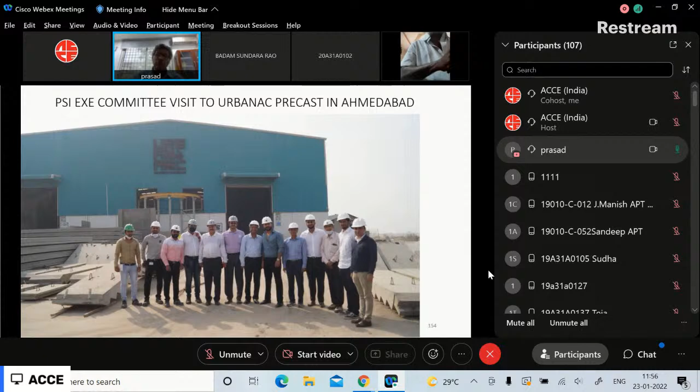Wallpapers are also now being addressed, as seen in one of the structures that Urbanac precast is doing. It is an RCC frame structure with a hollow core slab, but some of the developers wanted to go with AAC block wall as filler walls. They have allowed that, but they are doing a wonderful structure. You can see there is no congestion or anything, a neatly managed site. In all precast construction, the site is very neat and it goes in a simple and smooth manner.

What this gentleman has done also, to demonstrate precast construction technology, is one PMAY housing project proposed by Gujarat Housing Board. He built a stilt plus 4-story structure within his precast yard to demonstrate, yes, this is a precast structure, come and see. He is allowing government officials to come and see that he can deliver structures with this precast construction technology, as a beautiful demonstration of precast technology for PMAY structures. Hats off to this young gentleman.

Now there is another precast firm I have seen in Gujarat, in Ahmedabad, that is PSP Precast. PS Patel is a well-known contracting firm in Ahmedabad, known for their quality. I have come across so many people who say, 'Oh, PSP means quality,' like we feel Godrej means quality. There is a brand, there is a quality. In the entire Ahmedabad, I'm quite amazed, from engineers, consultants, and government bodies, everyone says PSP means quality. They have amassed a very big, good name, and then they built it.

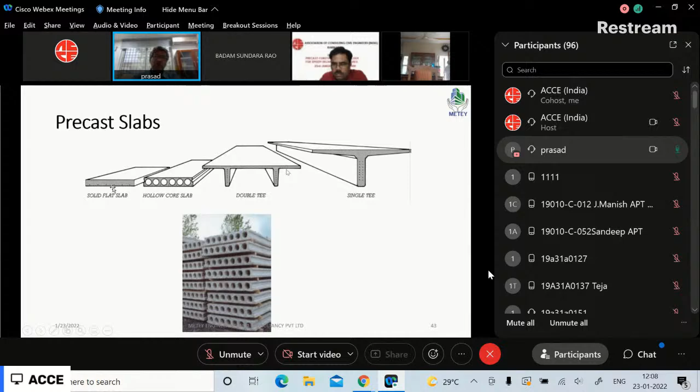The concrete grade used in this is M50, corresponding to the pre-stressing strand of about 1860 Newton per mm square. This is the same strand used in single T slabs and double T slabs, and even the solid pre-stressing precast slabs.

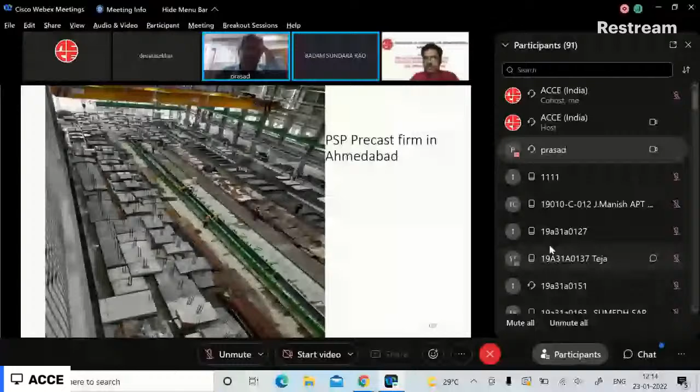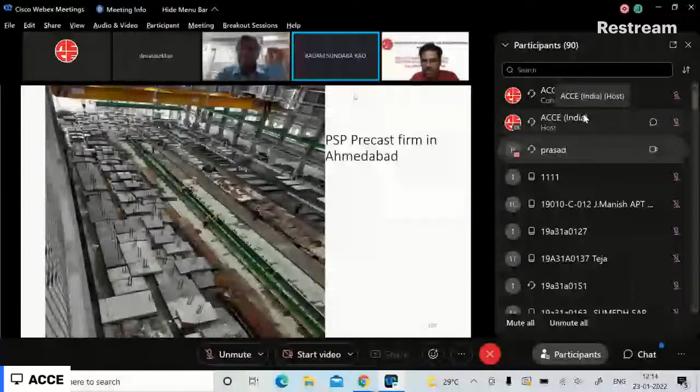Actually, the question is from me only: What is the performance of structure at beam column joints during earthquakes? What are the special precautions to be taken at beam column joints?

What happens in precast is that abroad, they go with steel connections at the junctions, using steel angles or steel plates. I am not prescribing that type of connection in India because ours is a predominantly seismic zone, and our industry has not risen to that level yet.

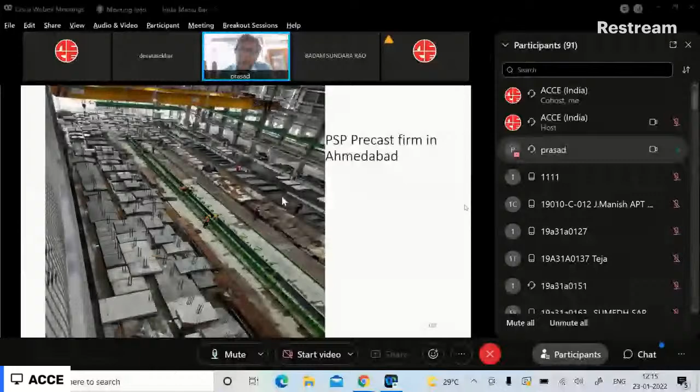The reinforcement of the precast column has an L bend into the junction, and then the junction is concreted. So virtually, like in cast-in-situ construction, what is happening at the junction is the same thing happening in precast also. It's a precast column with corbels, and the beam reinforcement projecting into the column junction enters into the junction, and we concrete it. Thereby, we are not doing any special consideration for the junction.

It is virtually the in-situ situation happening, whereby it is seismically strong and robust.

Do we use any special admixture or adhesive for the beam column joint, sir?

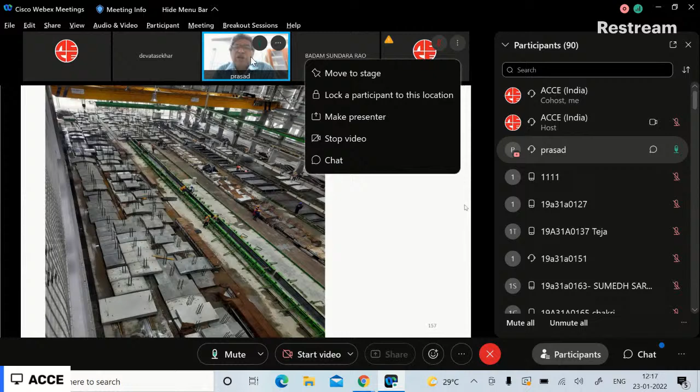Not necessarily. In this type of construction, the precast beam comes first, and then the hollow core slab comes on top of it. Initially, we place the precast beams or column corbels, and then do the junction grouting before the hollow core slab arrives, because this beam is an inverted T-beam. Up to the end of that inverted T-beam, we grout it with the same M40 or M50 grade concrete. Thereafter, we place the hollow core slab.

Along with the hollow core slab, the structural topping concrete also comes and joins the junction. So there is no necessity of any special grouts or anything for that.

Now, the grouts we are talking about are for precast walls, where we have sleeves. Into those sleeves, if the concrete wall is made of, let's say, M30 grade concrete, we provide an M40 non-shrink grout in the sleeves. A higher strength grout is placed in the wall sleeves, which form the connection between wall to wall.

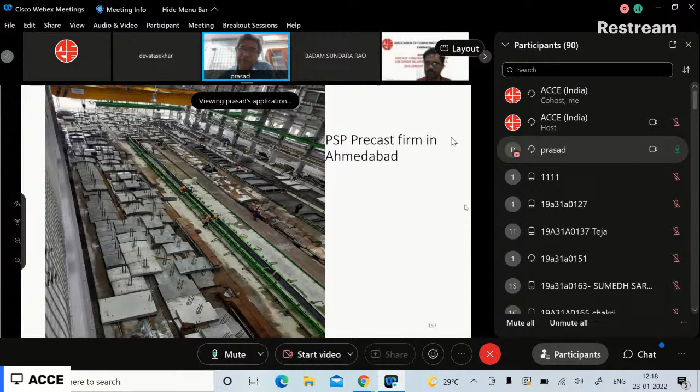In the same manner, at the column-to-column junction, we create a higher grade grout. If the column is made of M40, we go with M50 to M60 non-shrink, high strength grout, so it plays a wider role at that particular junction. But not at the junction of column and beams, where we use the normal strength grade meant for slabs and beams.

Sir, thank you very much, sir. One more question from Sundara Rao, sir: what are the best softwares available for designing precast designs?

There is no special software required. Just like how we design multi-story structures in conventional cast-in-place construction, we use the same software for precast. It is only at the junctions that we do the detailing carefully. No software is specially required for precast.

But there is a software called Tekla, which is used only for detailing purposes. Unlike STAAD or ETABS, which are used to design the multi-story structures, the same software is used for multi-story designs in precast too. It is only at the junctions that we have to deal with it differently, detailing it carefully.

That detailed presentation of the junctions between wall-to-wall and beam-column connections, I will show in my next presentation to the same audience. That has to go in the next session, because all of this cannot be absorbed by people in one presentation. Thank you so much, sir.

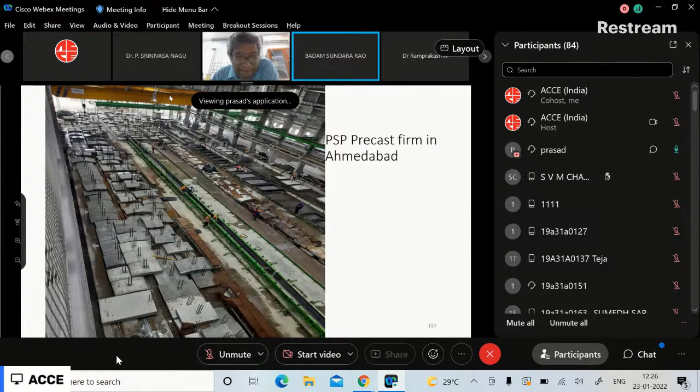First question is, what are the durability parameters taken into consideration in making precast concrete elements in view of environmental loading consideration?

Wonderful. Now durability is well explained in our IS 456 code. Basically, from durability aspects, what we will do is predominantly provide the cover requirements to the concrete elements. This is well put up in the table in IS 456:2000 for what is the requirement of cover for beams, columns, and slabs from durability requirement. The IS code has also given the requirement in terms of cement quantity to be used for durability, for mild, moderate, severe, and very severe conditions — what should be the cement quantity in the concrete mix as well as the cover requirement. Both these are followed in precast structures also, and durability is achieved. The IS code has also given fire requirements, specifying what is the cover requirement from fire protection. So in designing structures, whether conventional or precast, these requirements in terms of fire and durability have to be provided in the RCC elements and designed accordingly. Hope that question is answered.

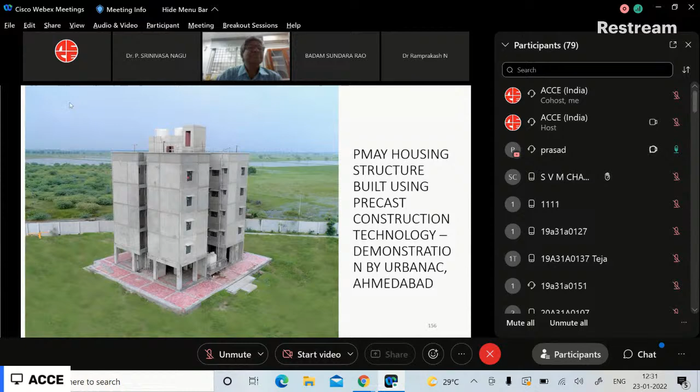Please brief about jointing mortar and its action against dynamic loading or horizontal forces.

Jointing basically comes at the locations of column and beam, where the same grade of concrete used for columns and beams is poured into the junction as well. Between the hollow core slabs, there is a gap of 40mm at the top and 2-3mm at the bottom. We use a non-shrink grout of minimum 30 grade, but we are providing about 40 to 50 N/mm² non-shrink grout between the hollow core slab joints.

Now, the horizontal diaphragm action. When we consider hollow core slabs, they act like simply supported one-way slabs, where the load will only go onto the supported elements.